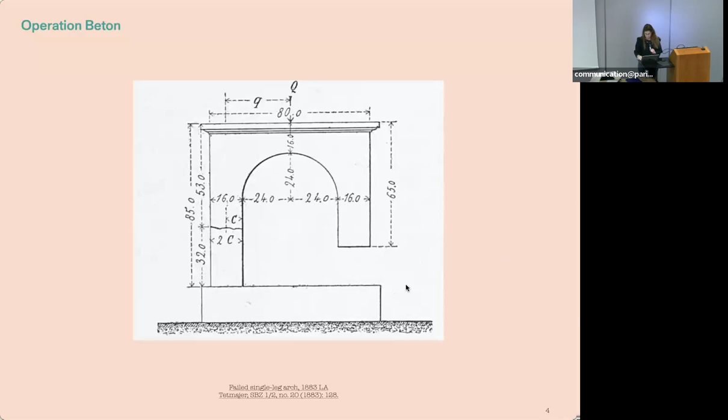To put this more explicitly, what that shows us is that materials aren't just made physically, they're not accidents that we end up with. There's no genius who discovers them. Materials are produced not just physically, but also conceptually. They become what we want them to be. So if concrete is a monster, it's because we made it that way.

So concrete comes to be thought of as permanent, monolithic, or liquid, as a kind of entanglement of idea, technology, and material, where these things are co-producing and where we have a lot of agency.

And so I put this here so that you understand this gaze in the image as a constructed view. In this case, of people trying to show concrete as something that is scientific, as something that is under control.

But think of what you know of concrete on a construction site, where it's messy, it's difficult, it's easy actually to use it by yourself without any sort of engineering expertise. It's used by a lot of people building their own houses worldwide. And so there is a desire to show and to create concrete in this way, in this image.

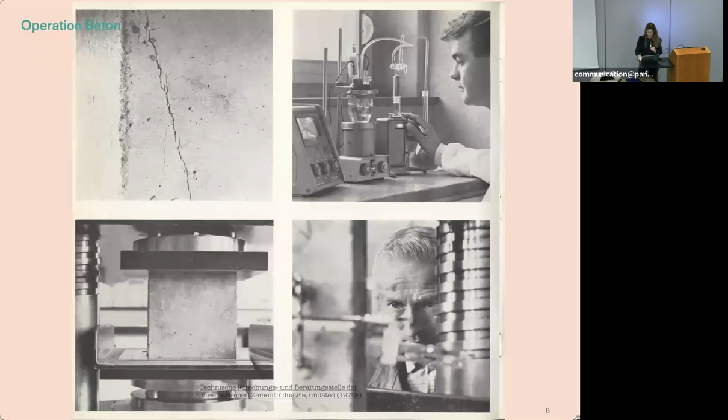And so concrete is a monster without form. So to guide us through the ways of it being monstrous, I'm going to use a building that gives it a figure. And that's a building called the Goetheanum in Dornach that was built in the 1920s.

It was part of Rudolf Steiner's anthroposophic community there, which is a whole other topic. It's a kind of esoteric, pseudo-religious community that borrowed a lot from Eastern philosophy, but also the writings of Goethe. If you know anything about the Waldorf or Steiner education, it's related to this.

And this is a building that was explicitly referred to as monstrous even before it was built. This is a quote from a handworker's journal before it was even built, criticizing this monstrous edifice as being the work of a dilettante.

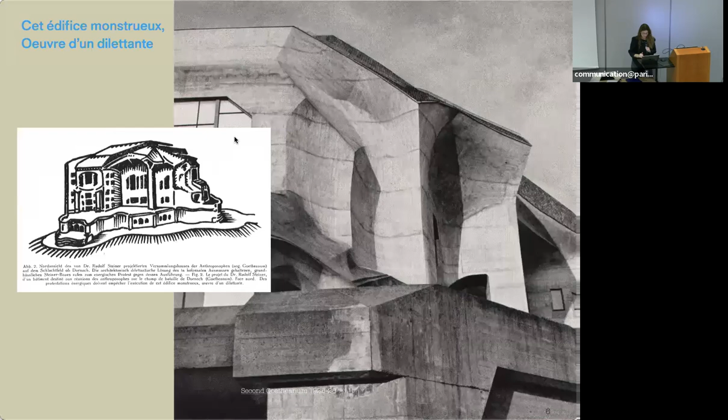And so it's a building that was completed out of completely monolithic, exposed, cast-in-place reinforced concrete, extremely unusual at the time, to house a performance hall mainly, and the adjacent offices around it, as you can see here.

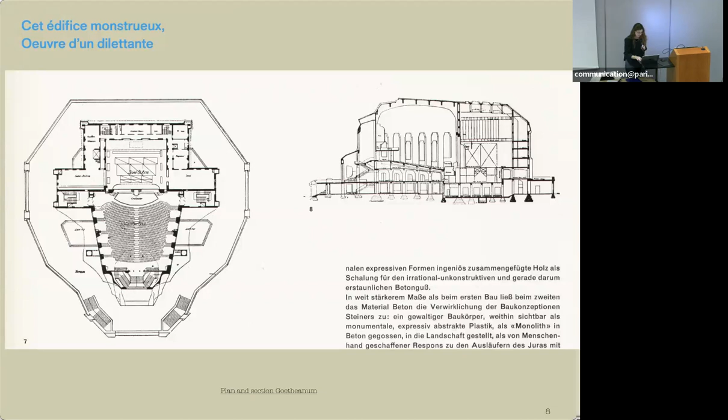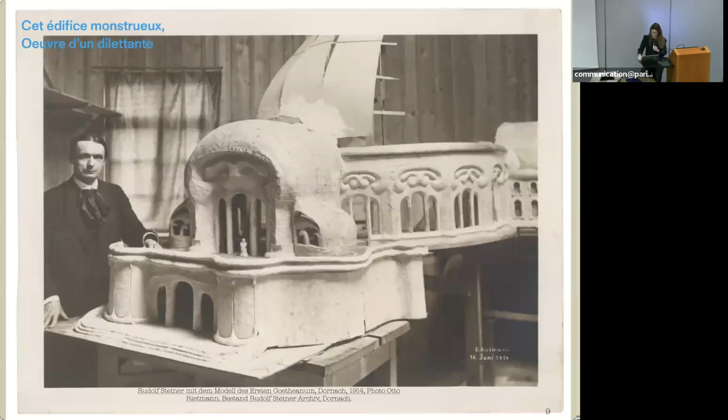Designed and conceptualized by Rudolf Steiner, the founder of this movement, this building replaces a previous structure, the first Goetheanum, which was built in wood, as you see here, and burned on New Year's Eve 1922 before it was finally completed. There's one other structure remaining from this period that looks like this, to give you an idea of what the original structure would have looked like.

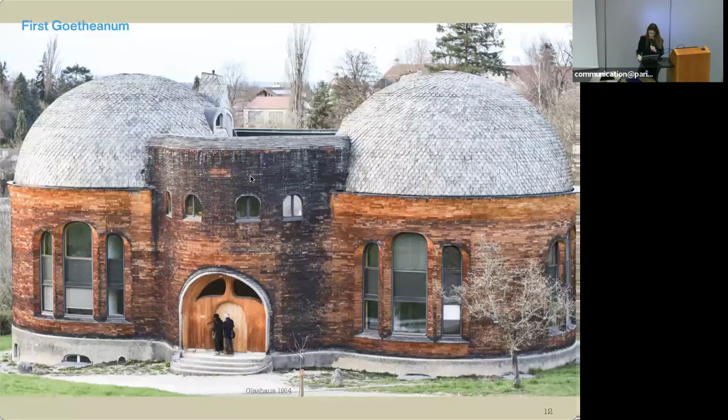In the aftermath of this fire, they decided to rebuild the structure out of concrete. I'm going to go through a few of the things I already mentioned as aspects of why this building is in concrete, what makes it monstrous, as more general principles about concrete.

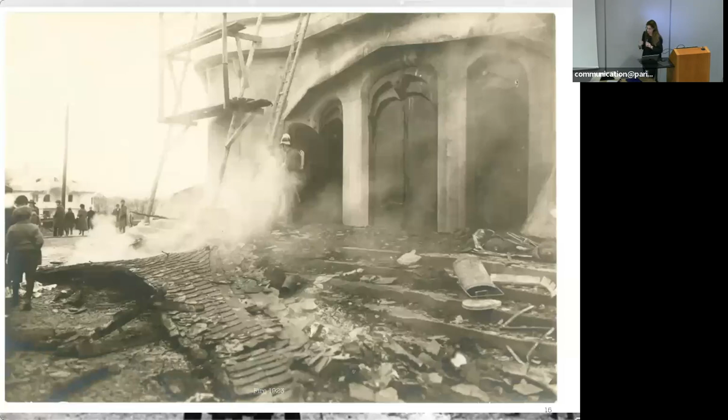The first is this idea of resistance. When the building burned to the ground before completion, the concrete base remained in place. This is sort of the origin story of why it's built the second time out of concrete. But this was not an exception, not one thing for one building.

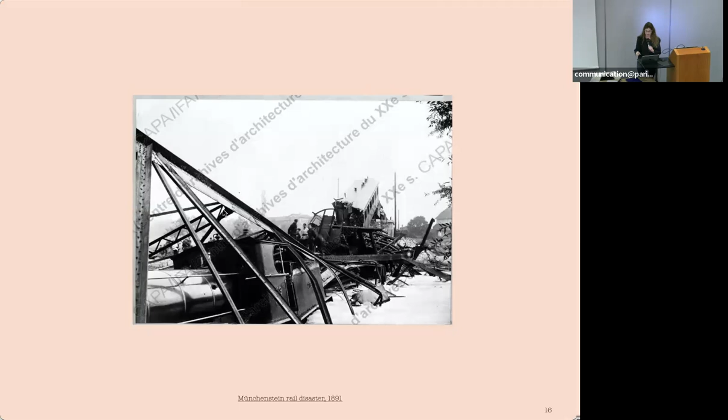A bridge constructed by Gustave Eiffel fell when two trains were crossing at the same time. It is only after this moment that reinforced concrete begins to be taken seriously as an alternate material considered safer. So when François Hennebique introduced his system for monolithic reinforced concrete construction, he also launched a journal called Le Béton armé.

As you can see on the side, there's this repetition of the slogan on the cover of all the editions of the journal over decades that says, 'No more disastrous fires.' It's this positioning of the material against something else, as something resistant to disaster, that allows concrete to have this opening in our building culture.

But this was also part of a colonial mentality and part of the colonial apparatus. Concrete buildings couldn't be burned, so they were better at keeping occupied territory under control.

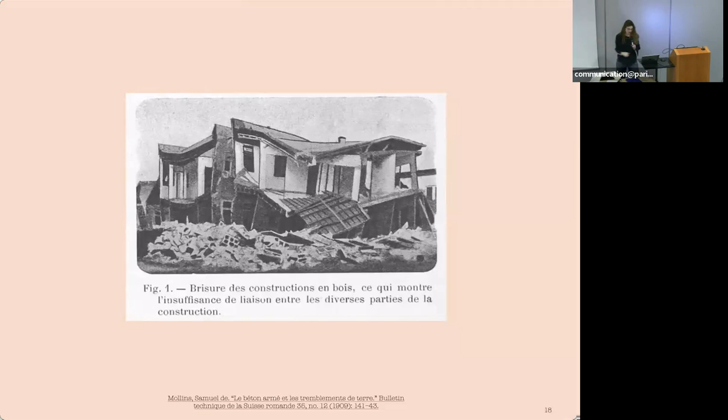The types of disasters that concrete was purportedly more resistant to then proliferate. There are two major earthquakes, in Messina and San Francisco, where these disasters become evidence in an argument supporting concrete. Images of disaster are printed and circulated worldwide in professional journals to show, look, this is what happens when you don't use concrete. There's this operative use of a split screen view, destruction on one side and preservation on the other, to make this argument in favor of concrete.

I'm trying to denaturalize this for you, to show you how thin the evidence is, but at the same time how the argument was constructed, and why it seemed attractive at the time.

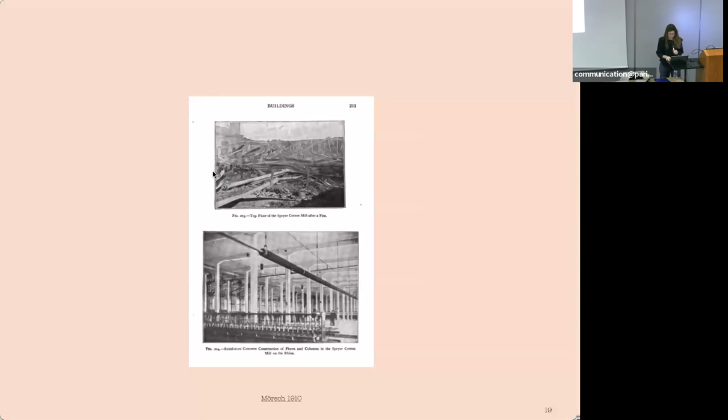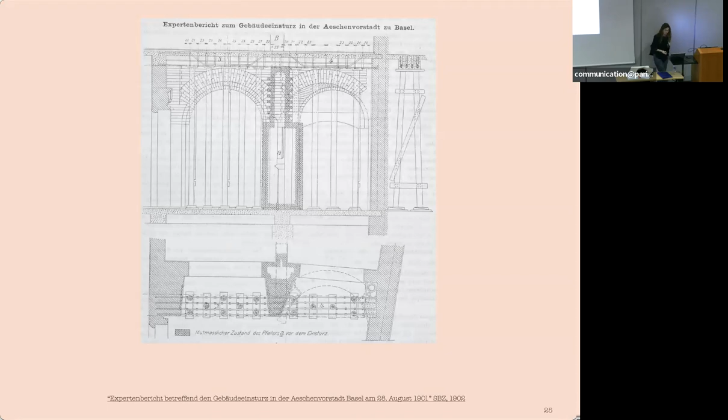At the same time, of course, there were also many examples of concrete failing. Here is forensic documentation of a building collapsing in Basel, in reinforced concrete, just after the turn of the 20th century. They studied why this collapsed, but each time a reinforced concrete building collapsed, they didn't attribute it to something inherent in the system itself. They attributed it to an exception—bad work, or someone substituting the wrong ingredient, using cheap gravel. So this was ignored and the arguments continued.

I would say they continue until today, and they're also still highly gendered. We think of concrete as something unusually strong, and unusually male as well in its strength.

So if resistance, this idea that concrete could survive anything thrown at it, was the first property that in the Goetheanum responds to the fire...

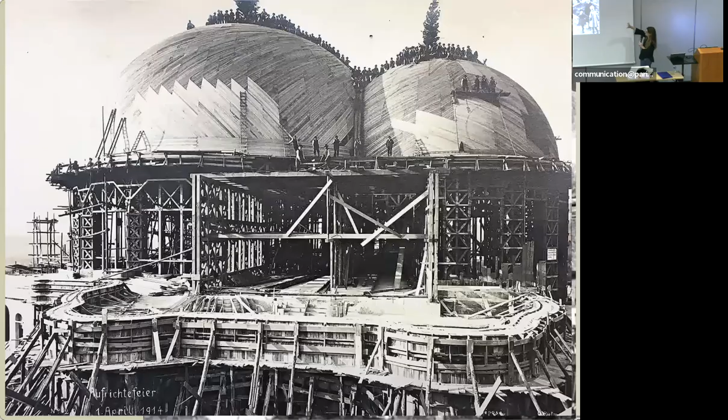The next is the idea that it is base. That base is, first of all, the base of the building, literally the foundations. Again, after the fire, the first Goetheanum, this base was all that remained. You can see here too, in the construction photos—there's always a delay—that in the first building, the base is cast-in-place concrete and the upper part is wood.

And so when they replaced this building, there is no longer a differentiation between the base and the upper structure. It's all concrete as well.

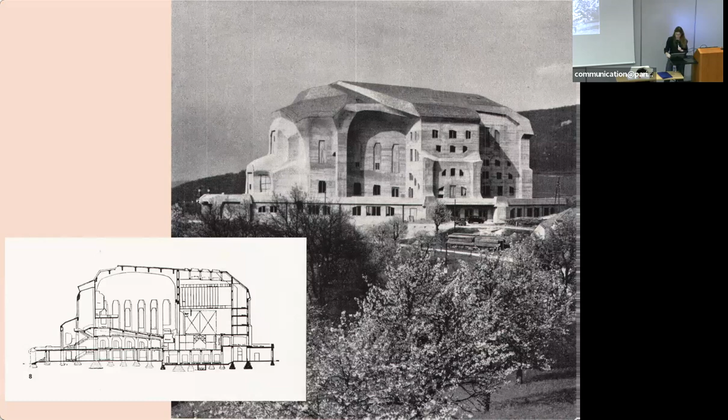So the foundation of the building is coming up out of the ground and becoming the rest of the building. Again, at the time, this was really unusual. There were almost no exposed concrete buildings at the time, with the exception of a few from Paris that were not cast in place like with this board-faced concrete that you see here.

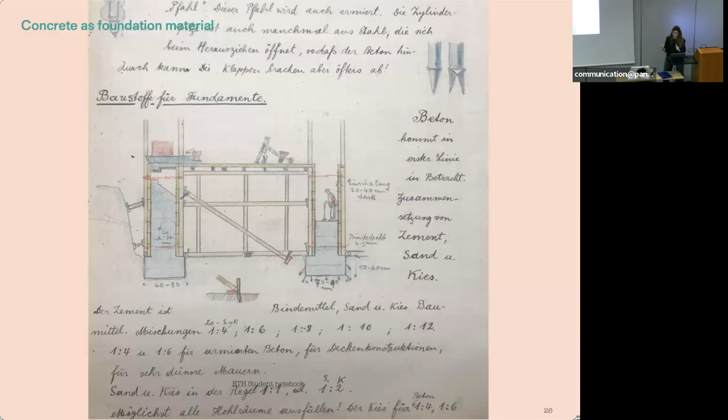This reminds us that primarily in the 19th century, concrete was a foundation material. These are even later notes from a student at ETH in their architecture courses, learning about concrete only in terms of how to use it for foundations. We could extend this to infrastructure and other things, but it wasn't considered an architectural material in the 19th century. That's one of the reasons why this Goetheanum building was described as monstrous, because it was taking a material that should be underground and putting it above ground on display.

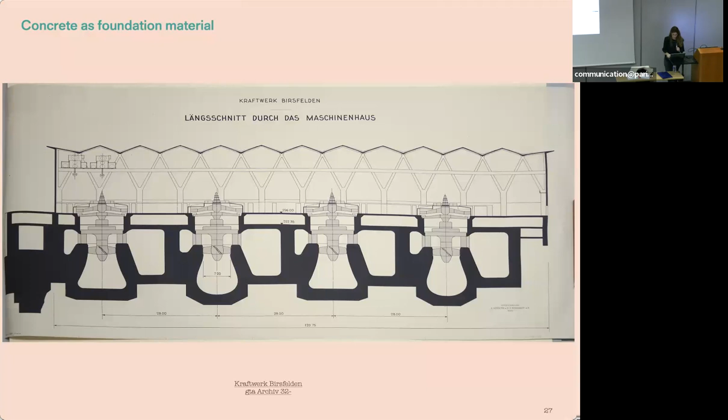So this is one way that concrete was considered base. The other way that concrete was considered base was about the status of the material itself and what it was made out of.

19th century concrete took sand and gravel that had been excavated from the construction site, mixed it with water that was also often there, and then added a hydraulic binder, either lime or cement. Because these materials were incredibly cheap and available, it wasn't considered very architectural, because it was too cheap to be treated with dignity.

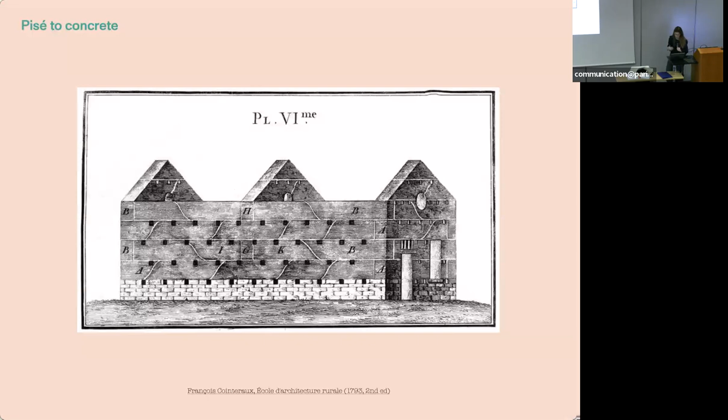At this time, there's very little divide between the renaissance of interest in Pisé construction that begins at the end of the 18th century with Cointeraux, and later is cemented with Rondelet's description of it, and what we would understand as concrete construction in the 19th century.

So basically all of the early aspects are there: the need for formwork, the fact that you need to ram it into place, the use of the material on site. These were considered rural practices. They weren't considered part of the work of the architect or part of the work of monumental building. This attitude can be summed up by the title of a lecture in 1871 given at the AA, titled 'On the Architectural Treatment of Rubbish.'

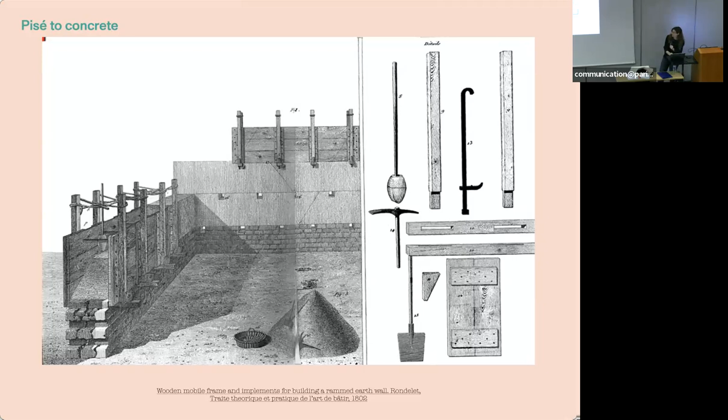But there were also minority voices at the time that were a little bit ignored, but in the history have been focused on, that saw a different possibility in this.

They said, well, actually the accessibility of this material is its promise. So François Coignet coined the term béton économique and built this house outside of Saint-Denis in the mid-19th century, with the idea that the ease of labor and the low cost of the material was exactly what made it exciting for architecture, and that this combination could actually transform the way that we think of architecture itself.

So he imagined that these cheap and disposable buildings would allow each generation to have dignified housing that they could change from one generation to the next.

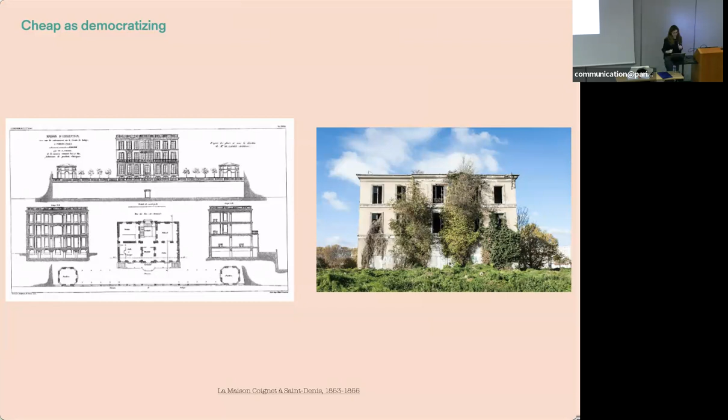This later becomes weaponized and taken on as a socialist slogan, where in Bern in the 1920s, a new Maison du Peuple was built for the Socialist Party of the city, right in the middle of the medieval city center. It was criticized by the public and by architectural critics, saying that it was built out of mud. The architect turned it around and said, yes, it's out of mud and iron, just like our workers. It takes these things and makes them even stronger because they are not exclusive and elite.

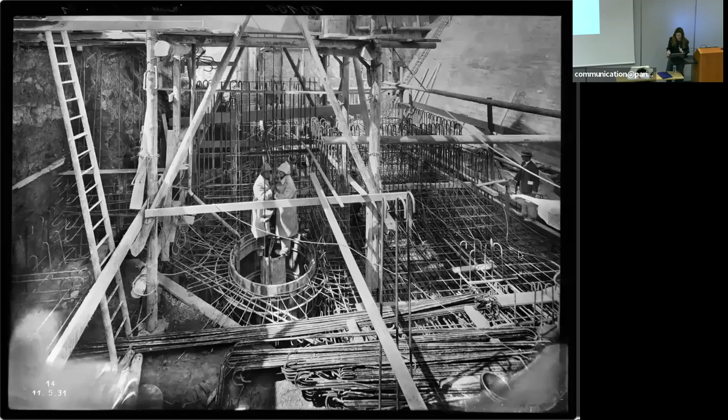And so we have resistance, we have base, and now we have poured or monolithic. And so we know today of concrete as something that is poured into place. And this is a photo of a construction site that happened around the same time as the Goetheanum, and you can see the workers standing on the reinforcement wearing raincoats and helmets waiting for the concrete to pour from above.

But at the time, this is something that was extremely new. So we turned concrete into a material that was liquid because we wanted it to be liquid. We wanted it to flow. And that's how we get these images of the workers here sinking into the wet concrete. And we get also these myths, mostly, of workers falling into the concrete and basically being entombed in the liquid as well.

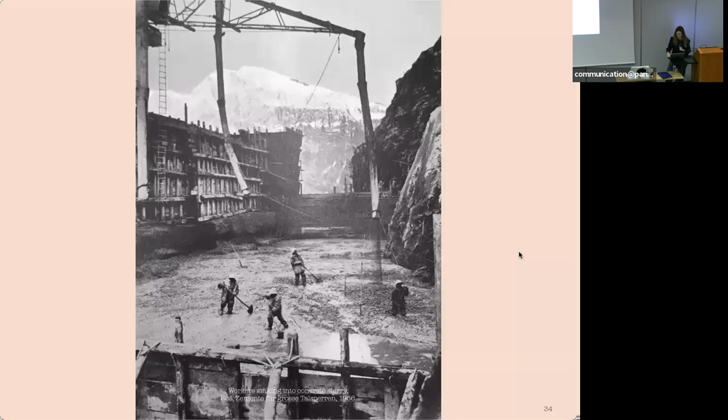And so, again, arising out of pisé construction, concrete at the time was usually mixed with very little water. It was hard to work. You had to really beat it into place. This is where the word béton comes from. You were ramming it with a rod into the formwork. It took a lot of labor. But there were always ideas about this process being easier.

And so this is the time I'll mention Le Corbusier in the lecture, but Corbusier, but also Thomas Edison in the US were, for example, two voices that had this idea of how easy it would be if concrete would be poured. And this vision of a flood transforming natural resources into new materials, of houses of liquid concrete poured in a day, shows that this fascination with the idea of pouring preceded the technical reality.

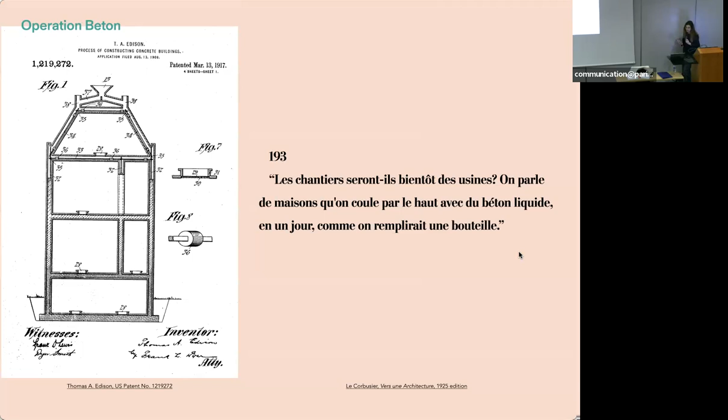It's based on the idea of construction as something that is quick and easy, but durable. And so there are notions here of economy, repetition, removal of skill, and removal of workers, a way to automate that would remove the discomfort of architecture's reliance on labor. And so again, this happened before it was a widespread procedure.

But in the 1920s, around when the Goetheanum is being built, to reduce labor, but also reliance on skilled labor particularly, this wet mix concrete, first developed in the US, was rapidly adopted in Europe on a large scale to take on bigger projects faster. And when this introduction happened, it was kind of botched because no one really understood what it meant to add a lot more water to the material.

And what it did is that it made the material very brittle. And so there's a whole generation of projects that basically had to be rebuilt because the concrete was falling apart the moment it was finished.

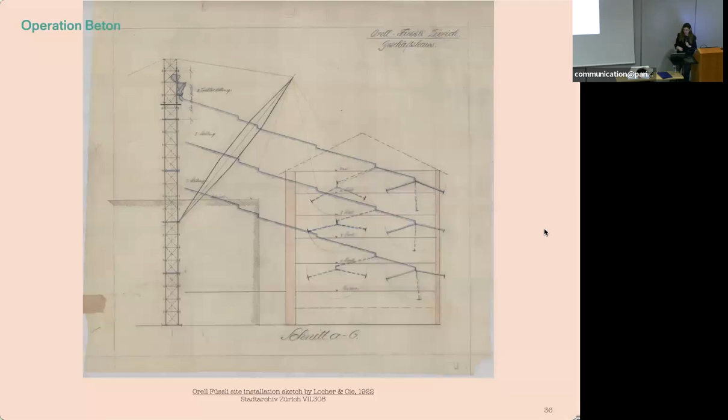And I think this rush to use wet concrete shows that this idea of flow, of ease, was so powerful that it threatened to supersede the other qualities of concrete that had already made it a material competing with all of the other materials that we know, like masonry and wood and cast iron and so on, because they knew already that adding this water reduced strength and durability.

And just to back up even further, there were, again, minority voices even early in the 19th century where we see these ideas being put forward, such as the Swede C.G. Rieden, who suggested that concrete would be ideal work for women, which in turn would save construction costs because you hardly needed to pay them. And so this is an early example of this de-skilling argument that later becomes crucial for the introduction of cast concrete.

But pouring meant something else, and that something was very important for architecture. It will show up now, yeah. And that is also this idea that it can be monolithic. And so you see that again in this Le Corbusier quote, the idea of a single pour, the idea that if you're pouring everything in place, it can eventually become one solid block of stone, an artificial stone, but a stone nonetheless.

And so this was also actually a problem, but an interesting problem for architecture, where so much of architectural theory was about tectonics and about how you represent the joint between the different materials, about the flow of forces. And then suddenly you had, first of all, an indeterminate system that was taking forces in both compression and tension, but also something that was entirely solid.

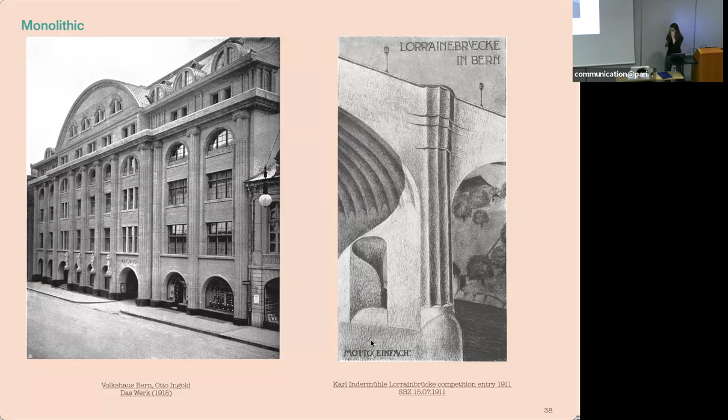But then, you know, there were also other ways where possibility was seen. And that, again, similar to the Goetheanum, is with this idea that when you're pouring, you can make any form you possibly want. And of course, this is totally untrue because any form that you want to make, you have to build a formwork for. So sometimes when it's very complex, they would even bring in boat builders so that they could bend the wood panels in a particular way.

But there were examples where this inspired a particular idea of an organic form that couldn't even actually be executed in concrete. So what we have here is an example of a tower that is inspired by the idea of concrete. Erich Mendelsohn had this idea that the organic form of concrete could produce a totally new architecture, but then actually what he tried to conceal is the fact that when they went to actually build the building, it wasn't possible to do it out of concrete. So the entire thing is done in brick masonry, covered by a very thick layer of plaster in order to make the organic curves.

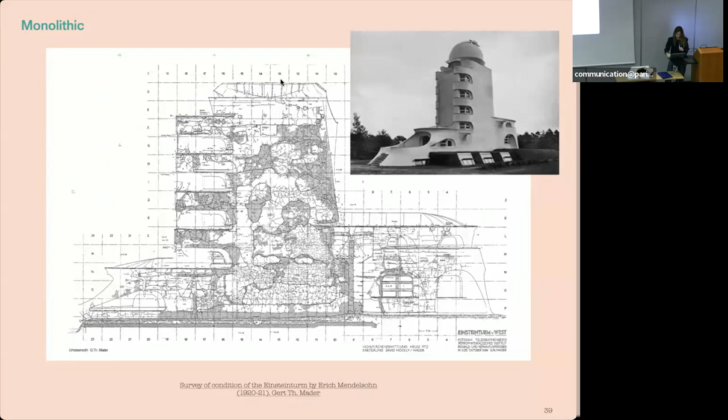And the last thing about this liquidity is that it introduces uncertainty and a lot of also throwing of blame and discussion of labor conditions, because one of the things that's very unusual about concrete is that it's not just something that is delivered on site and sort of built up in a very obvious way where everyone can check the work. There's so many different variables. There's the quality of cement, there's the quality of the sand and aggregate, there's the quality even of the water. There's the quality of the way that the formwork is built, the way the concrete is mixed, how long it sits out, how it's put into the formwork.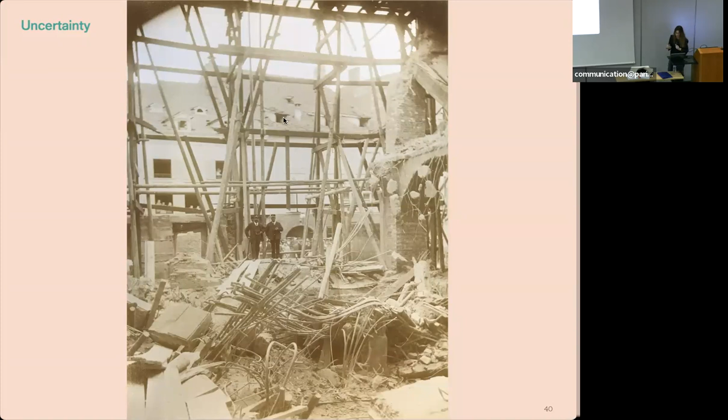And then after all of that, at this time, you would have to leave the concrete to cure for weeks on site. And so you would wait and wait and wait, and eventually you would remove the formwork and just hope that what you find is that the concrete is what you hope it will be. But of course, things went wrong all the time. So this again is another early collapse where the false work couldn't support the weight of the wet concrete, but also very commonly and increasingly, there's a delay.

You would have pretty much on any construction site problems more like this, where you take a column out of the formwork and you have places where the concrete just hasn't reached, the rebar is exposed. And of course, in this case, it means that the structure will not be able to be maintained. But you also have then superficial problems, like when the drying is uneven, you get this kind of cracking pattern.

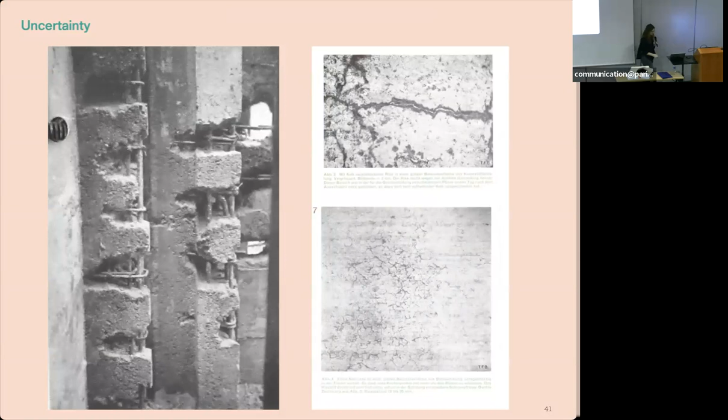And so increasingly, with the idea of the surface being exposed, this is always shown as the thing that is natural, as if it's easier to do than covering it, because you're already pouring the concrete into the mold. So why would you cover it in plaster or anything else? You should just show it because it's there, right? But because these things were going wrong all the time, and because it's so difficult to control the surface of the material, this is actually the most difficult way of doing a concrete structure.

And so over the course of a few decades, you get more and more control, not just over the material conditions, but over the conditions of labor, just to make sure that the surface of the concrete that the architects want to expose is as clean and smooth as possible.

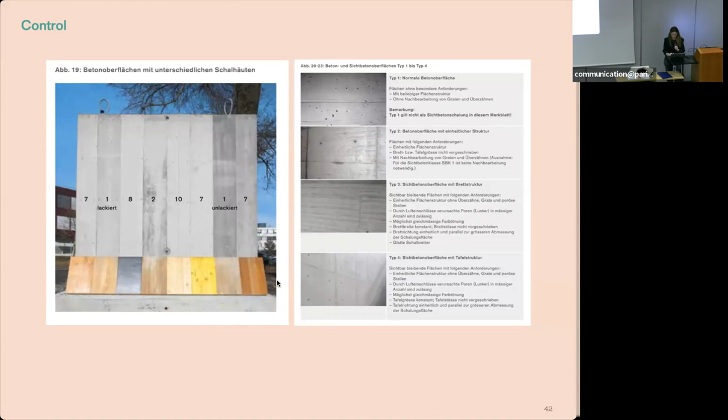And so that wasn't a result, it was a highly curated process that really changes the way that the workers are acting on site. And this process is predicated also on hidden forms of care that actually hide that the material is as vulnerable as it is and make us think that this is something that is easy to do.

So this is a recent example from the National Museum in Switzerland in Zurich, designed by Christ & Gantenbein. This is a terrazzo floor in one of the rooms where the concrete didn't settle properly. And so a few days before the opening of the exhibition, they shaved off the layer of the top cement, and they found that they weren't able to see any of the kind of artistic aggregate that was in it. And so I don't know if you can see it on the photo, but everything that you see here is painted on. None of this is actually aggregate.

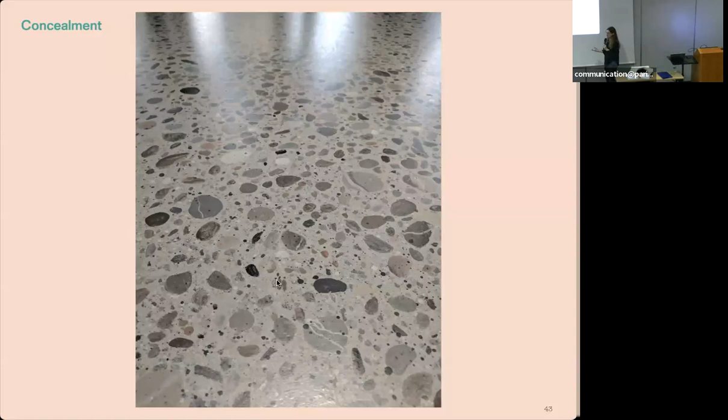And so there is an entire industry called, in German, Betonkosmetik, cosmétique du béton, that is about actually going in when there are these surprises, when things come out of the formwork, correcting them, which is hiding the vulnerability of the material and reinforcing this myth that it is solid, inert, that maintenance is not needed, just like actual cosmetics.

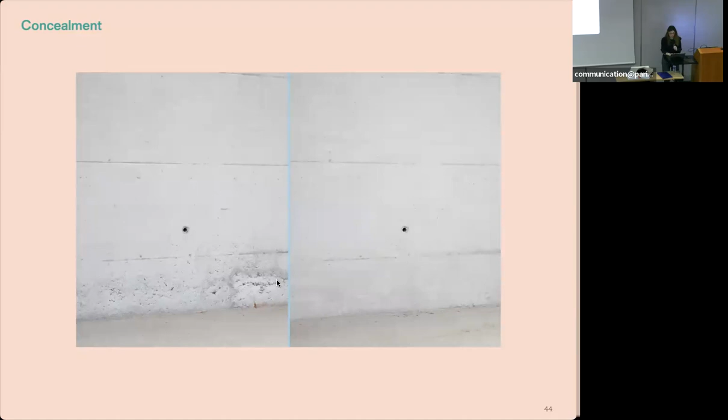So now I'm going to turn away from things. So until now, what I've been talking about is characteristics that we can directly link to this one particular monstrous building, the Goetheanum, that was finished in 1928. And from now, very quickly, just for the end of this, I'm going to begin to move forward. And so to sort of speed up, we have, by this moment in 1928, when that building is finished, this idea of pouring, of ease, the idea that concrete can be used almost anywhere.

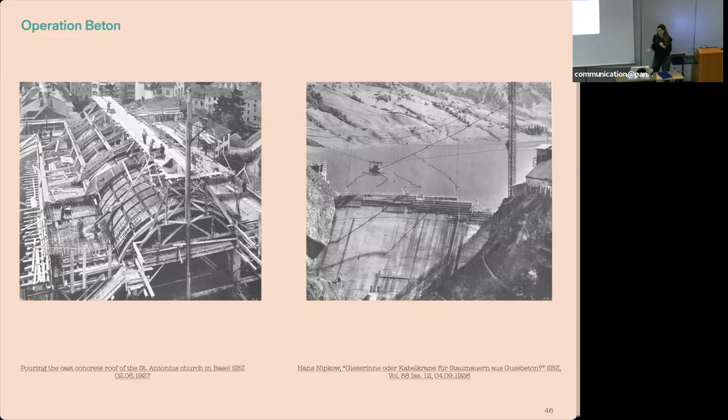And so we see this here at the scale of a building, but also at the scale of things that are so big, it would have been previously unthinkable to take these on in a span of years. A hydropower dam of this size used to be a generational project. With these new technologies for pouring concrete, it could be done in a couple of years.

And so that meant that by the year that the Goetheanum was finished in 1928, the architectural historian Siegfried Giedion looked at what was going on in France and said, maybe prematurely, he looked at these gasoline tanks, sugar refineries, and reinforced concrete, but also iron and steel infrastructure, and claimed that these networks of extraction, storage, and distribution amounted to a redesign of the Earth's surface.

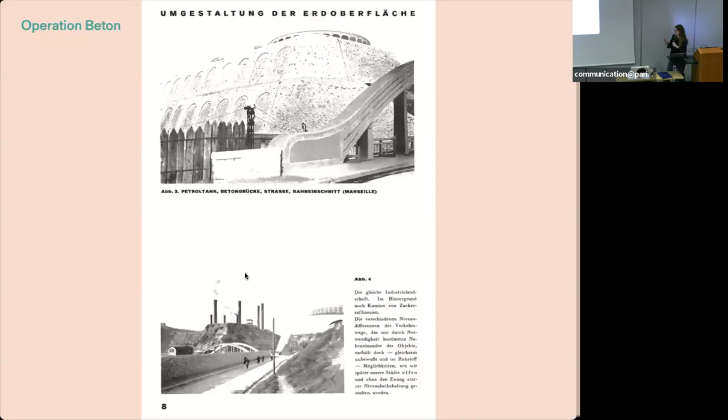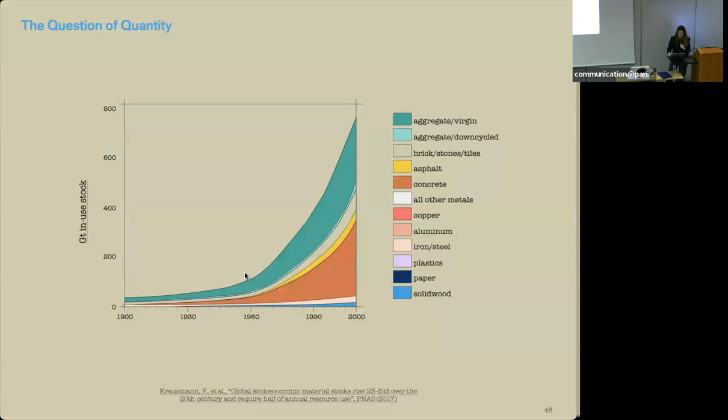And so this is where we start moving a little bit from a tipping point, an idea of a resource or a building material that is scarce, that has limits, that you have to use economically, to something that is potentially endless. And that brings us back, of course, to here. So what happened in the meantime, we reach in the post-war period, as we see in this graph, this possibility of ubiquity.

And this is where also the position of architecture changes, because the building is not a solitary object anymore. It's one thing that is part of this bigger network that is being made out of the same material that is all interconnected. So your house is connected to the plumbing, which is connected to the roads and runways, to the hydropower being produced in the electrical network, to these underground spaces, and so on. And so how do we make this shift? How do we jump out of scarcity?

So part of this is a little bit technical in the economic sense, but it has to do with the way that we understand a building material as a commodity. And in order to explain that, I'm going to talk about wheat, as William Cronon describes it in his book about Chicago, Nature's Metropolis. So there is this transformation, more or less, which allows concrete to be endless, which is that we move from an idea of something which is concrete or specific to something which is abstract.

And so what that means is that cement was no longer one of the commodities that was a specific product of human labor on a particular tract of earth, but it was an abstract quantity that could flow anywhere. And the way that this is done is through the normalization of cement at the turn of the 20th century under national norms that determined its key qualities, which were mostly its compressive strength.

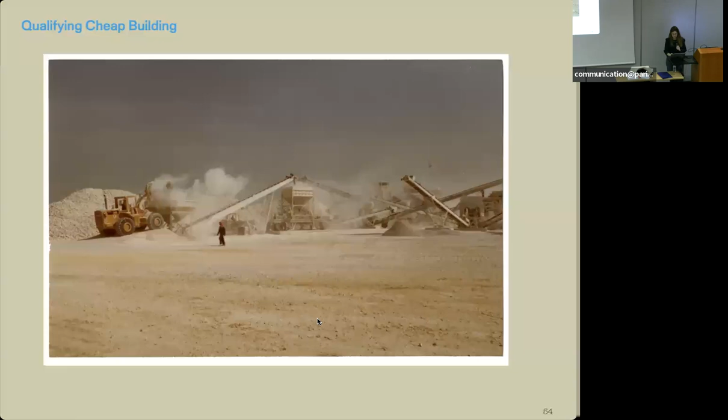And to someone constructing their own house with a few small bags of cement, the price is not only much higher, it's also less stable. It fluctuates daily on the local market, making it impossible to anticipate the cost of their construction project. So in short, those who have the least pay the most, not just in relative, but also in absolute terms.

So one last piece. When the Goetheanum was being finished in the 1920s and 1930s — you have to imagine this with me because I don't have an image for it — we see the emergence of a very strong architectural idea: the concept of immutability. Against this 19th century romantic idea of beautiful ruin or decay, new buildings and modern building materials, including concrete, but also aluminum, chrome, glass, and steel, would be completely resistant to decay. They would remain pristine, like their reproductions in photographs. This was paired with a specific claim that not only would they be immutable, but they would be maintenance free.

As long as they were properly constructed, they didn't need maintenance. And I think this antagonism to maintenance is extremely telling. It goes together with a larger technical shift where the knowledge about construction is being enclosed, where the academy doesn't want tacit knowledge competing with its hierarchy.

As engineering and architecture are trying to establish themselves as professions, as the Austrian architect Anna Heringer has pointed out, maintenance as cycles of renewal—thatching, rammed earth, stucco, and so on—becomes a form of knowledge transfer that allows the protection and maintenance of local, non-enclosed tacit knowledge. So for the technicians, claiming concrete was maintenance-free also meant breaking those cycles and reinforcing the need for formal training, legal prescriptions, and industrialized building.

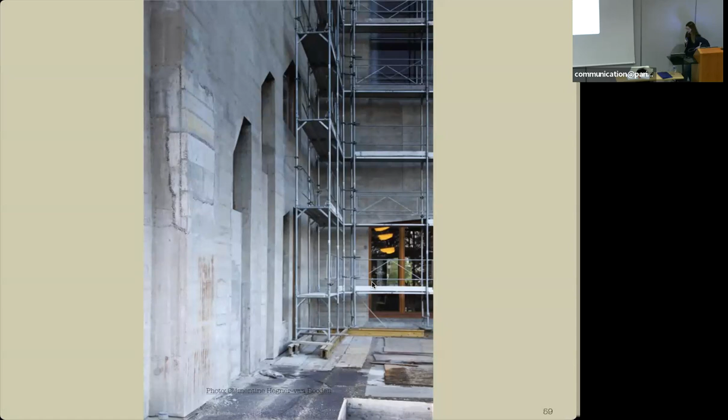And yet, how did we get there? Because we also see so much evidence of concrete not being inert. So here we return to the Goetheanum, where we see works of repair in place, where we see examples of the concrete surface degrading in places where it has already been patched, and in many cases different generations of this patching occurring.

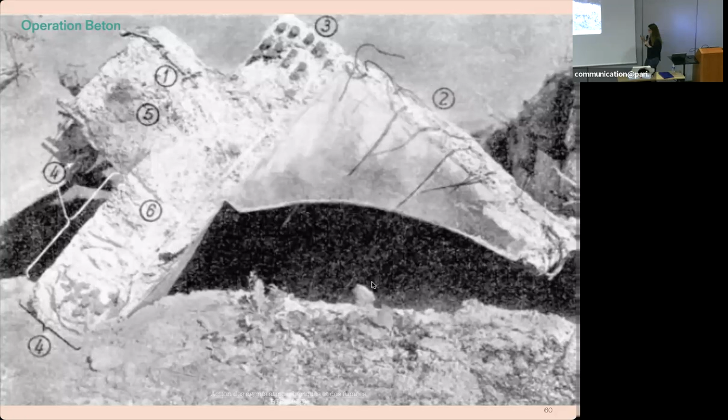But the belief that concrete was inert was so strong that when evidence of decay began to appear in the 1920s and 1930s, engineers didn't want to hear it, and reacted with shock. This was published, for example, in the mid-1930s, showing the effect of acid on concrete. The accompanying text talks about how it's almost impossible to believe that concrete isn't permanent. And even though this is almost laughable today, it's something that has repeated—each generation of material scientists and engineers believes the vulnerabilities of the material have disappeared because their new, improved concrete is now superior and has overcome these limitations.

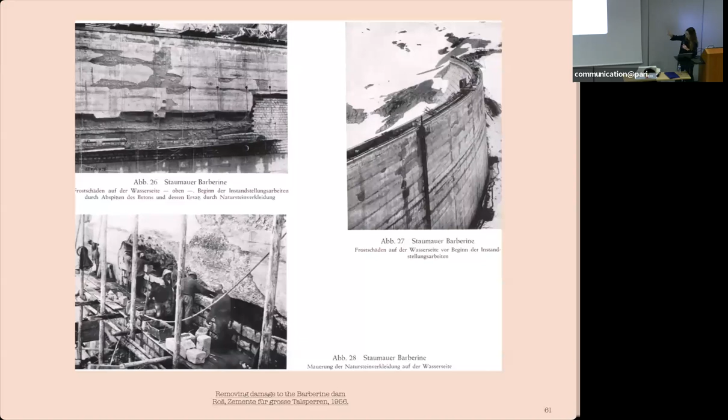So here's another example of when these vulnerabilities were appearing. Despite these repeated claims that new, improved concrete could endure, it kept not enduring. It was, of course, more fragile than it was communicated.

And so this brings us to—we could talk, for example, about Stephen Jackson's idea of broken world thinking, that we need to change our perspective and think instead through fragility, to think of infrastructure in today's world as increasingly cracking and breaking down, and thinking of this as a mode of approach in a world in constant process of fixing and reinvention, reconfiguring and reassembling into new combinations and new possibilities.

And so he talks, for example, about the yards where shipbreaking happens, or where boats are broken down. He talks about cell phone repair shops, Wikipedia editors who are constantly making all of these small modifications to the entries.

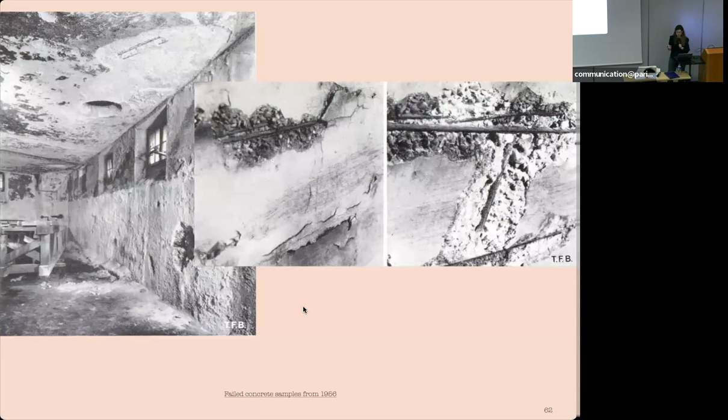He sees this as a way of thinking about maintenance and repair as foregrounded, as an aspect of technological work that is a way of talking not just about functional tasks, but also moral relations in the world of technology.

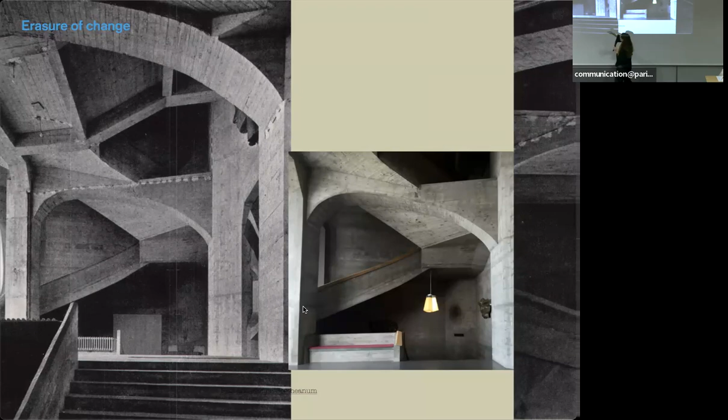That's why I think it's interesting to talk about this idea of inertness as the story of why we let things crack, the prehistory to what Stephen Jackson is talking about. Even in historic photos of this building, as you see on the left, just a couple decades after it was finished, we already see the need for patching, sometimes to make changes because something so solid is also a liability, but other times because cracks have spread, since there are no expansion joints.

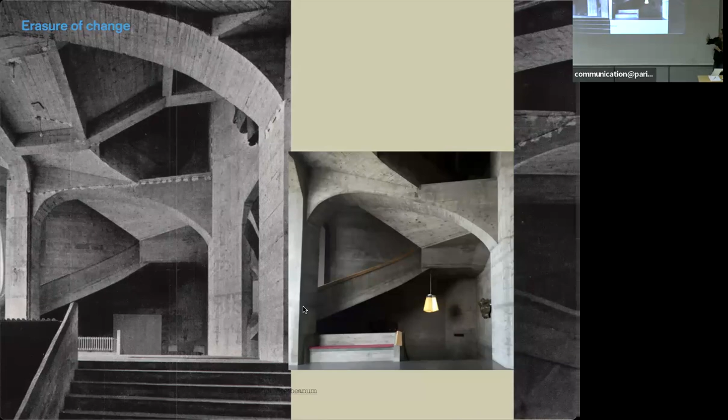And then here on the right-hand side, the same image, but after this practice I was describing before of béton cosmétique has come in and removed all of these flaws.

So to turn it around, if this idea of inertness has pushed care aside, what happens if we introduce a more dynamic view when we think about materials?

This was the subject of an exhibition I contributed to at the Pavillon de l'Arsenal earlier this year, where we wanted to look at concrete not just as spectacular buildings, but all of these exposed concrete buildings that we don't really want to have, but we have them, and we know that if we just discard them and build something new, we're making the crisis we're in even worse. So what we looked at was this idea of hubris and broken promises.

And then the cycles that appear of patching, repair, new issues, hiding the vulnerabilities, different from other forms of repair that are so current right now, because when you enact these concrete repair practices, you hide, again, the vulnerabilities of the material. You make it look stronger than it actually is.

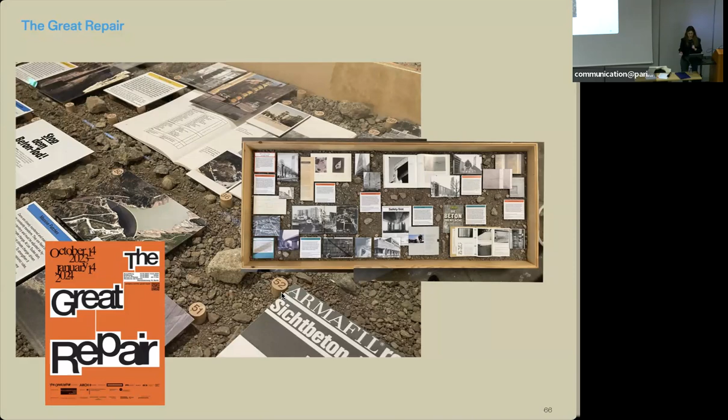So we looked at examples instead where this vitality, this change, is allowed and accepted, either accidentally or within the agency of the designer.

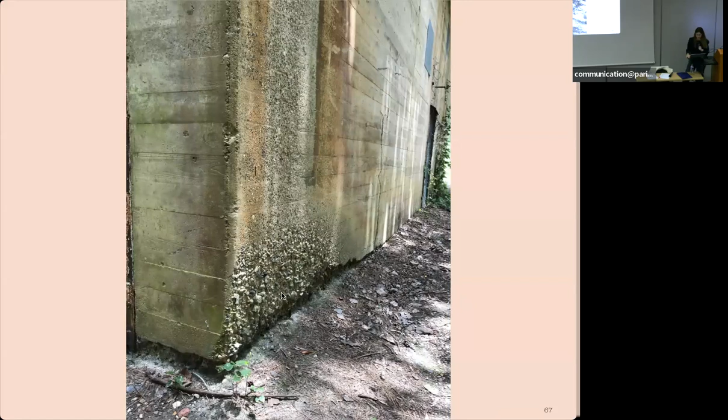And there are architects who have embraced this. In this case, a project by Rudolf Olgiati, who's Valerio Olgiati's father, and I think a much better architect, understood how impossible it was to get a perfect facade of concrete, and wanted instead to pour the concrete in the most rough way possible, so that over time the roughness and errors would actually multiply.

This is a house he built for his brother in Flims, and not only do you see the roughness of the original cast, the way two surfaces are not put together evenly, but also the patching in the middle, where when the surface needs to be repaired to protect the integrity of the structure, it's intentionally done in a way that doesn't match the continuity of the facade.

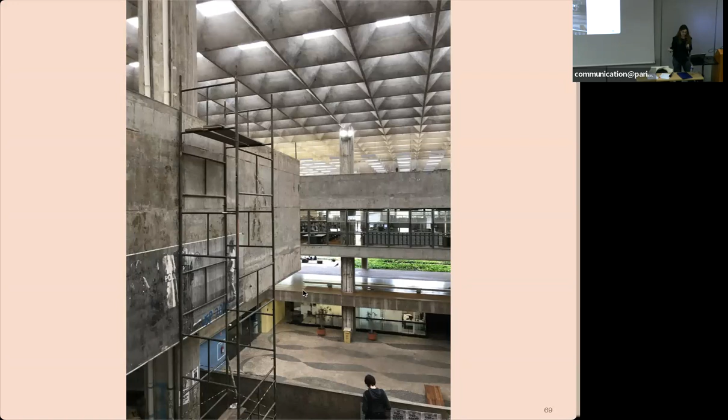There are structures as well, for example Artigas at FAU Sao Paulo, that are basically in a constant state of renovation and repair, where I've never visited without seeing some kind of repair and conservation practices going on.

That's really in opposition to this idea of the pristine repair view. Here's another example of a facade that has been replaced with a latex simulacrum with a new layer of concrete, where the only place in the facade where the original concrete is visible is this tiny window showing the original construction date.

And so what we looked at in this exhibition is not just examples of the material changing, but also examples where the material, the most dead of all materials, was still even able to enter into more complex relations, also as part of an ecological system, no matter how poor it is.

So this, for example, is a completely standard reinforced concrete office building. There's absolutely nothing interesting about it, except that Heinz Isler, a Swiss engineer, moved his studio into this office in the 1970s, and he plugged the drains of the roof so that water would pool on the top of the surface. His idea was that a standing layer of water would not only protect the concrete, which works well under still water, but also act as a free layer of insulation, protecting the interior from extreme heat swings.

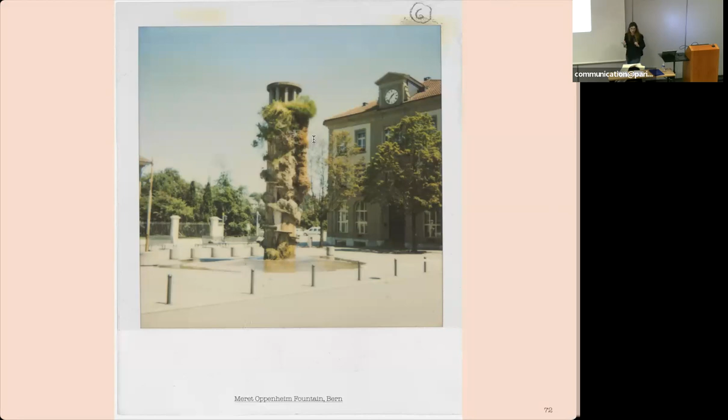If I understand the second half of the comment, this is maybe another answer to why I look historically, because the building culture that we have today is not the result of our values or ethics today. It's the result—building culture changes very slowly. We have things locked in place, not just thinking, but also infrastructures that are the result of previous modes of thinking that we now have to grapple with. That's one of the reasons why, when we think about what this transition needs to be, we shouldn't think in tabula rasa terms, but rather from what we are already grappling with today—history still having an agency in the present moment.